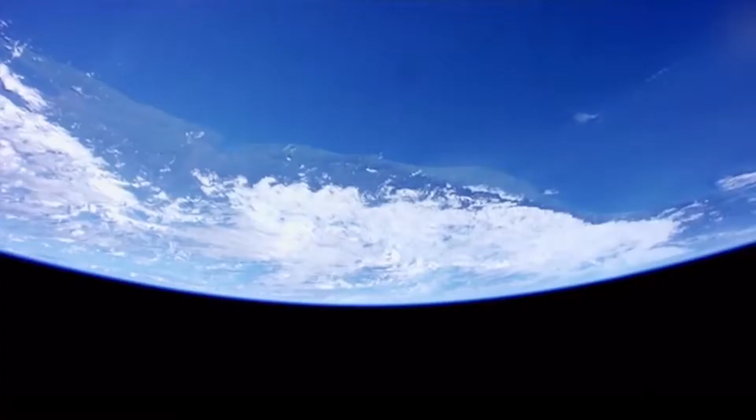A step towards a clean environment is adopting cleaner production or cleaner technology. Cleaner production, or CP, is a holistic proactive approach to end-of-pipe treatment that is applied to the entire production cycle, to increase productivity by ensuring a more efficient use of raw material, energy, and water, to promote better environmental performance through pollution reduction at source.

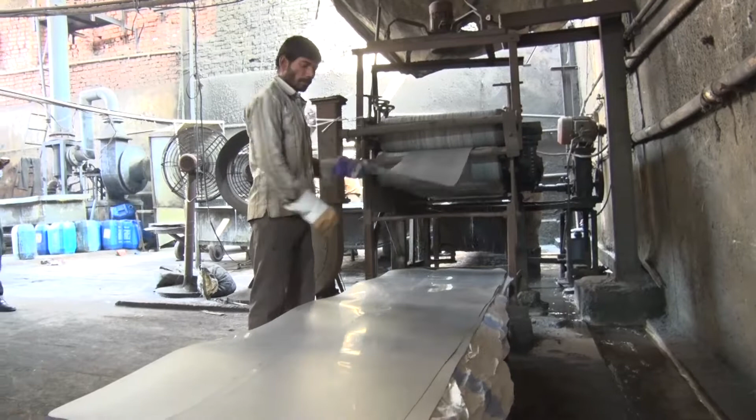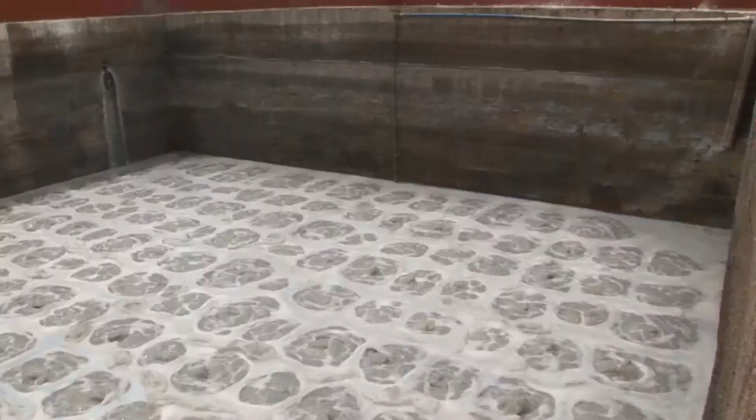Cleaner production is the improvement in operational processes to make more efficient use of inputs such as raw materials, water, and power along a company's value chain. On a broader scale, cleaner production can help reduce problems like solid, liquid, and gaseous emissions by adopting efficient manufacturing practices. In this context, waste is considered a product which can be used as a raw material for other industries.

Gujarat Cleaner Production Centre, or GCPC, has been established by the Industries and Mines Department, Government of Gujarat, with technical guidance of the United Nations Industrial Development Organization. Since 1998, the centre has been actively engaged in the promotion of cleaner production, or CP, and clean technology, or CT, through various activities such as orientation and awareness programs, CP assessment projects, CP demonstration projects, and CP dissemination programs.

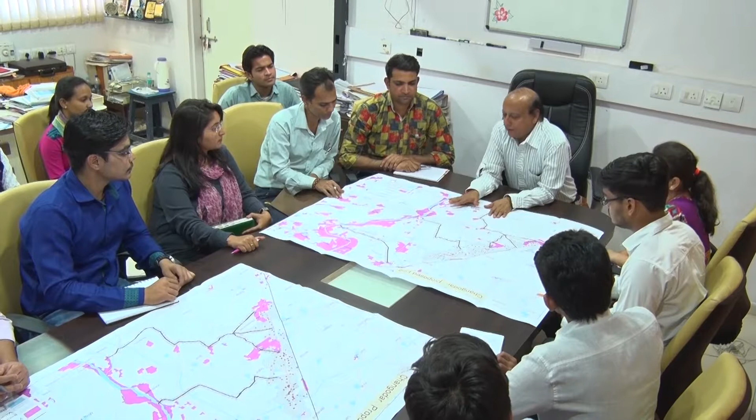GCPC is a regular member of RECP, the Resource Efficiency and Cleaner Production Network of UNIDO, and is also a regular member of the Climate Technology Centre and Network, a working arm of UNFCCC under UNEP. Gujarat Cleaner Production Centre is an Environmental Information System Centre working on cleaner production and technology since 2003, under the Ministry of Environment, Forest and Climate Change, Government of India.

The Environmental Information System Centre focal point ensures integration of national efforts in environmental information collection, collation, storage, retrieval, and dissemination to all concerned. The contributions of GCPC over the years towards promotion of CP and CT in the state of Gujarat, to improve productivity and reduce environmental problems faced by SMEs, have been significant.

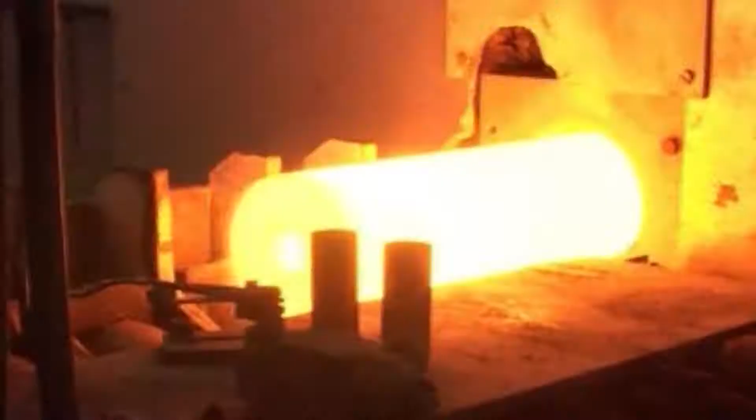Re-rolling industry is an inseparable part of the Indian industrial sector. Its contribution to the growth of the state as well as the nation is noteworthy. The success stories are many, but the sector still has a long way to go for achieving sustainable growth. The re-rolling industry has played a key role in the development of infrastructure, housing, and industrial development of the country in the past 50 years.

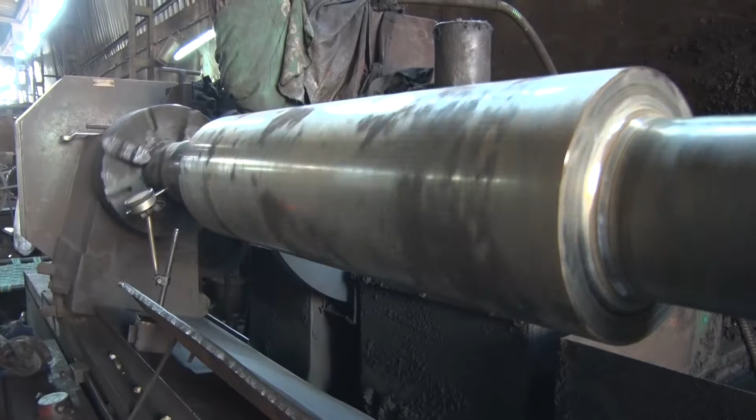India has approximately 1,800 re-rolling mills. The steel re-rolling mill industry in Gujarat has been in existence for over 50 years. The first re-rolling unit in Gujarat was set up in 1948 at Bhavnagar. There were 74 re-rolling mills in Gujarat in the year 1981. This activity spread over two major re-rolling clusters in the state, that is Bhavnagar and Ahmedabad.

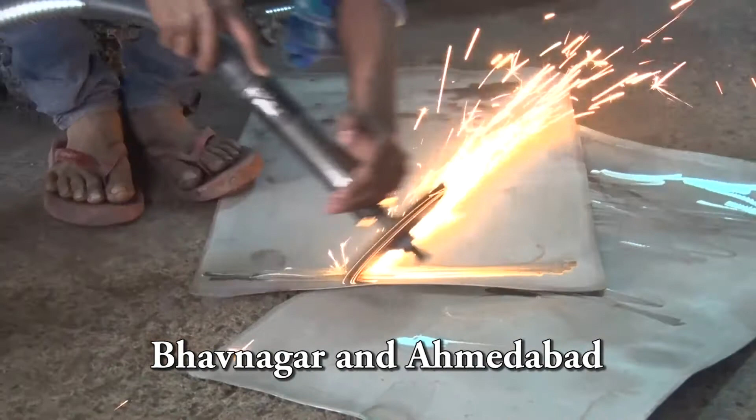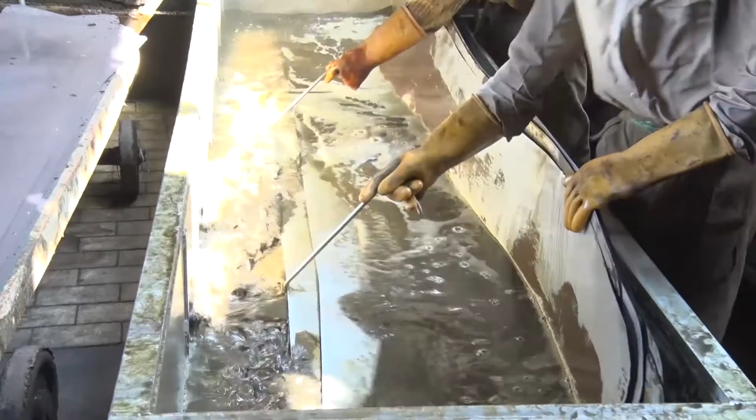The major concern of the re-rolling industry is the slag generated in the process, a major part of which is disposed of in landfills. The acid used in one of the processes in the sector produces a huge amount of sludge, so there is a need to introduce acid regeneration technique to decrease the environmental load.

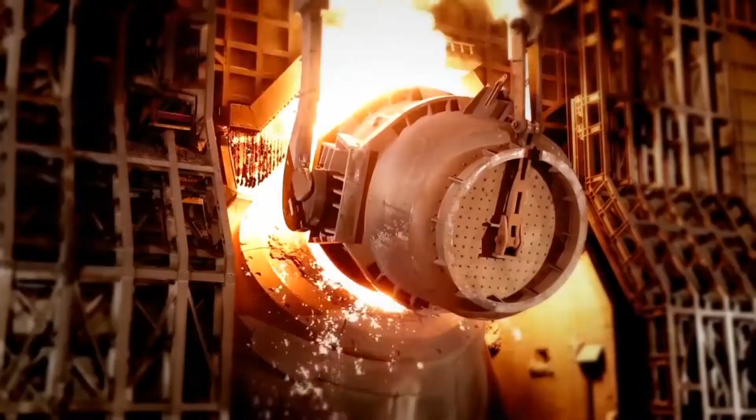With that, emissions of pollutants to air during reheating of furnaces and heat losses from the furnace are a cause of concern. Also, emissions including suspended particulate matter, oxides of sulfur, oxides of nitrogen, and carbon dioxide from induction furnaces are equally harmful to the environment and human health.

Unskilled labor and lack of standard operating procedures for the process are some other major areas to focus on. Since the beginning of the sector, no route has been established for automation, as the scale of operation is less compared to other sectors. Hence, there is a need for implementation of CP techniques which can reduce waste generation in the process and help save a handsome amount of capital, ultimately benefiting manufacturers as well as nature.

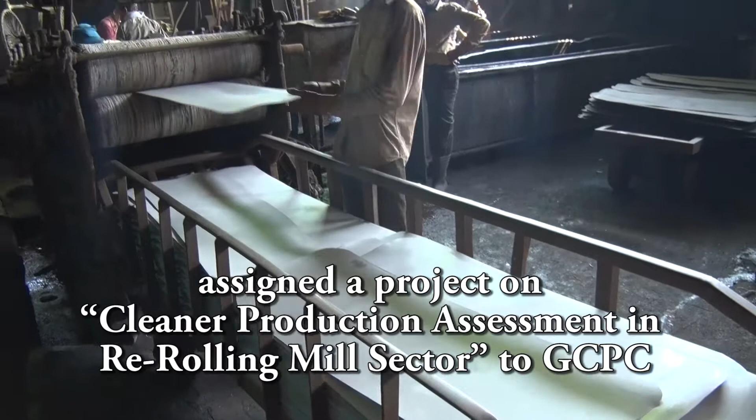Recognizing the need to eradicate these environmental issues in the sector, the Department of Forests and Environment, Government of Gujarat, assigned a project on cleaner production assessment in the re-rolling mill sector to GCPC, to reduce the load of emissions from this sector.

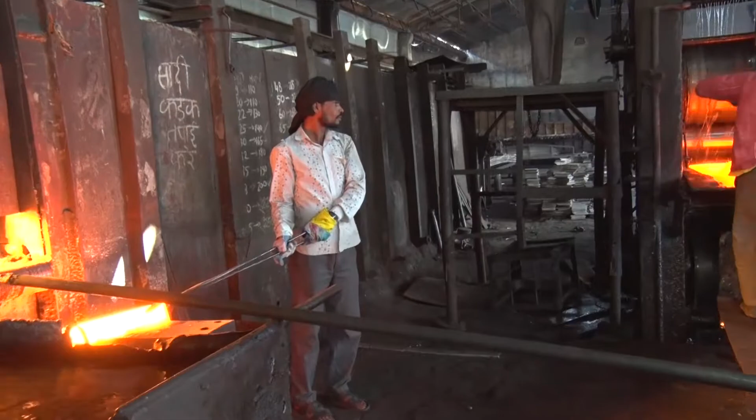Under this, 5 rolling mills were identified from different industrial clusters like Odhav, Vatwa, GVMM and Kalol, with varieties of products practicing hot or cold rolling. In these 5 rolling mills, detailed RECP assessment was conducted by GCPC.

Major project objectives include performing cost saving through reduced wastage of both energy and materials, improving operating efficiency of the plant, recovering waste materials, and building capacity of re-rolling industrial floor personnel.

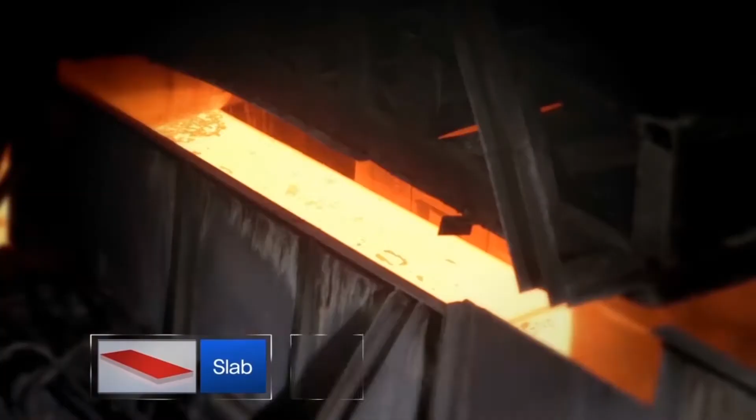Rolling industries are generally classified on the basis of the temperature for rolling. Hot rolling mills: in these mills, rolling is done above the recrystallization temperature of the metal. Hot rolling process can be done during uniform working temperatures. Hot rolling is used to break down the blocks into billets and blooms.

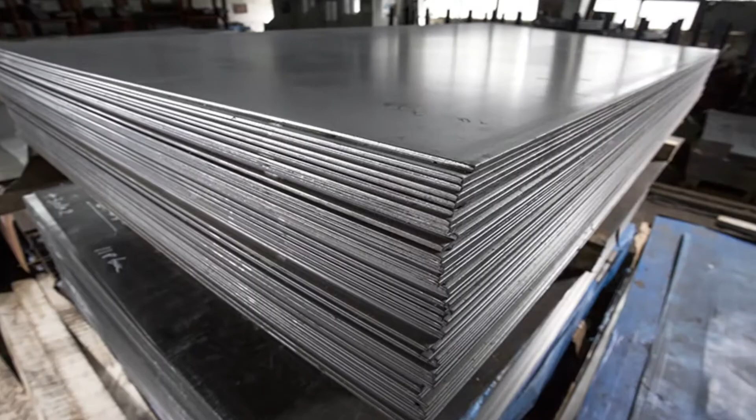From that, it transfers the material to produce new products like sheets and plates. Hot rolling is done at high temperature ranges only to develop large deformation, resulting in stress-free products.

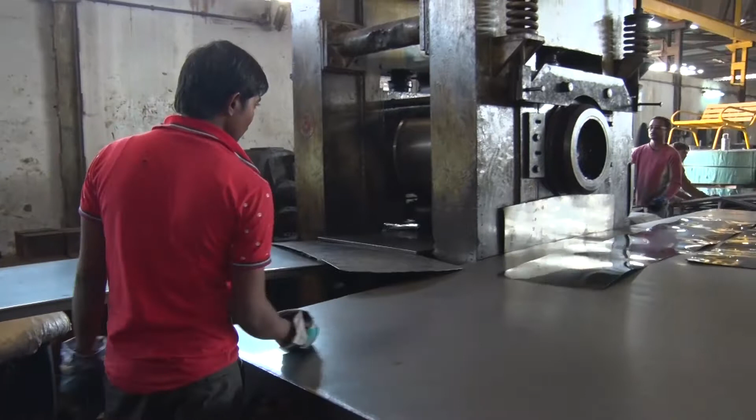Cold rolling mills: in these mills, rolling is done below the recrystallization temperature of the metal. Rolling in these mills, normally done at room temperature, increases the strength of the metal through strain hardening. It improves surface finish and holds tighter tolerance when compared with hot rolling.

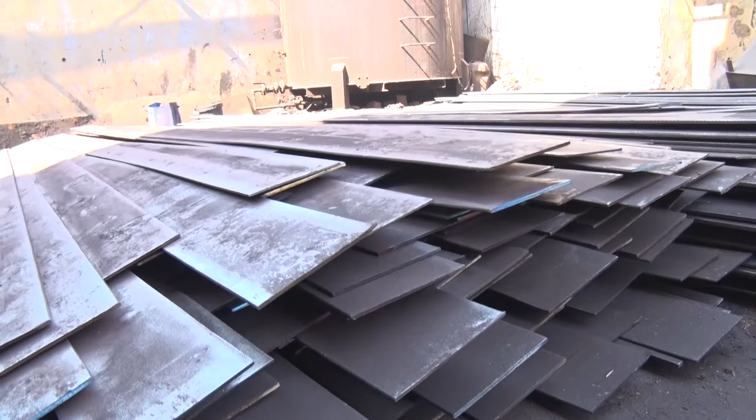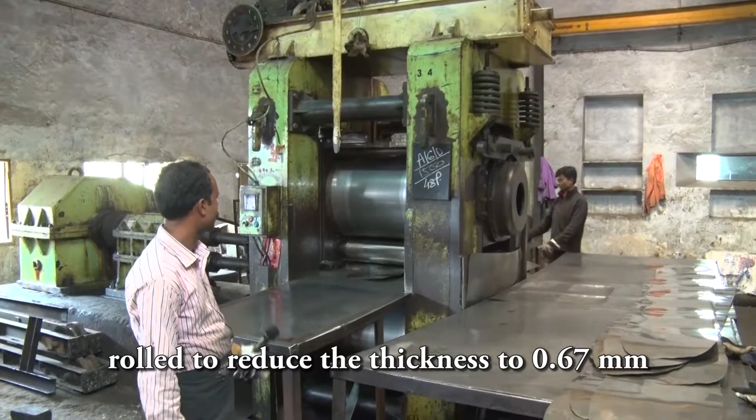Process for re-rolling industry: the raw material of the cold rolling process is the product of hot rolling mills. Stainless steel sheets from the hot rolling process have a thickness of approximately 1.5 mm, which is then rolled to reduce the thickness to 0.67 mm.

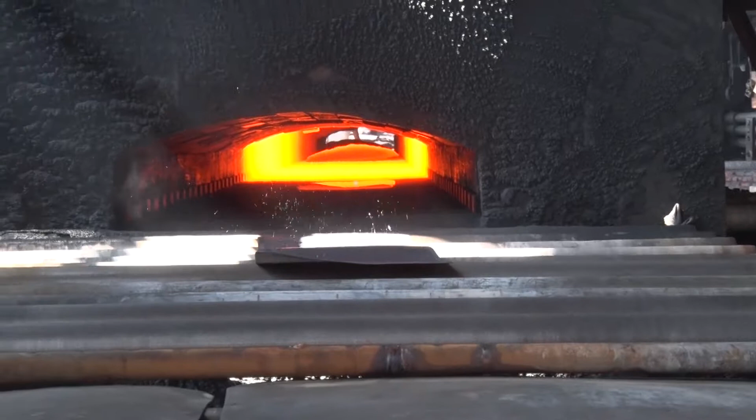Annealing process: the sheets obtained from the hot rolling process are sent to the annealing furnace of cold rolling, which is flat and holds a temperature of about 1000 to 1200 degrees Celsius. The main purpose of annealing is to remove the hardness present in the sheet.

As soon as the sheet comes from the other end, it reacts with the atmospheric oxygen. After that, carbon dust or process dust is generated on the surface of the sheet.

Acid pickling: this process contains sulfuric acid, nitric acid and hydrofluoric acid. The sheet, after being annealed, is dipped into the first tank of sulfuric acid and water. This removes 80% of the carbon present on the sheet.

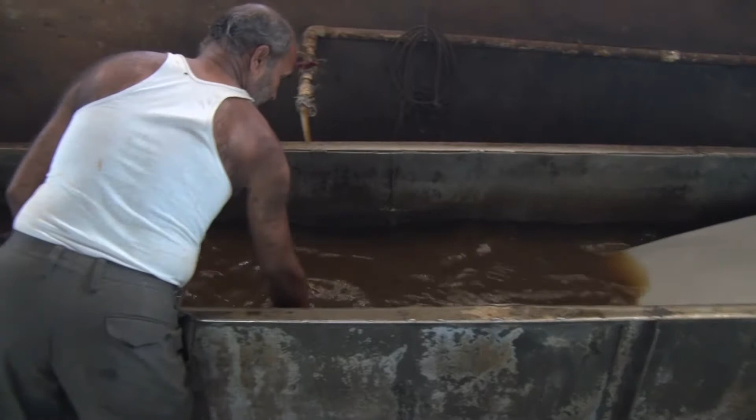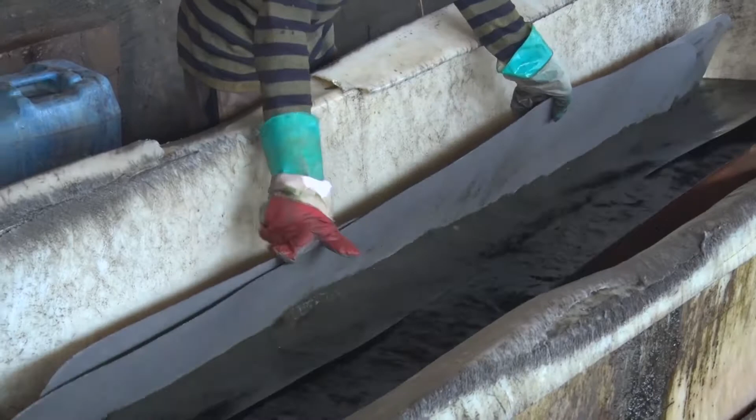Then, in the next tank, discarded acid and hydrofluoric acid is present. Continuous manual agitation is provided so as to remove the remaining percentage of carbon and get a shiny surface on the sheets. The last bath involves 40% hydrofluoric acid, 60% nitric acid, and 98% sulfuric acid.

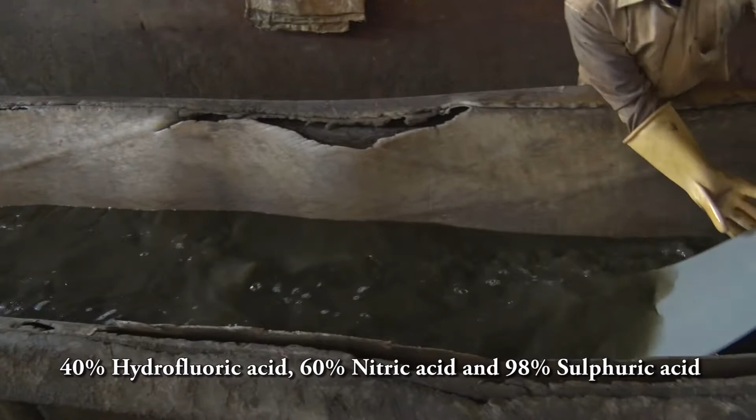This slot is the fresh combination of acid. After the last dip in the mixture of acid, the sheets are rinsed with water.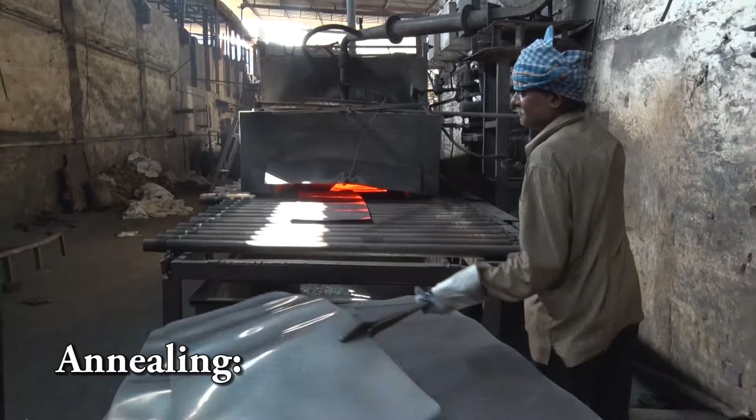Rolling: this is done so as to reduce the thickness of the sheet. Annealing: the sheets which are rolled in the rolling mills are annealed to reduce strength and hardness and to further elongate it.

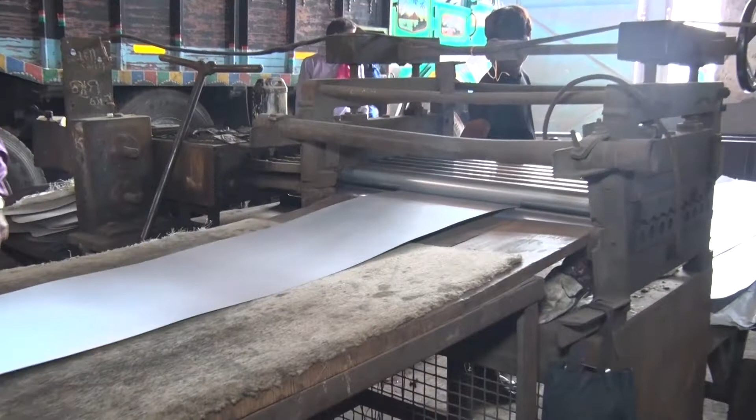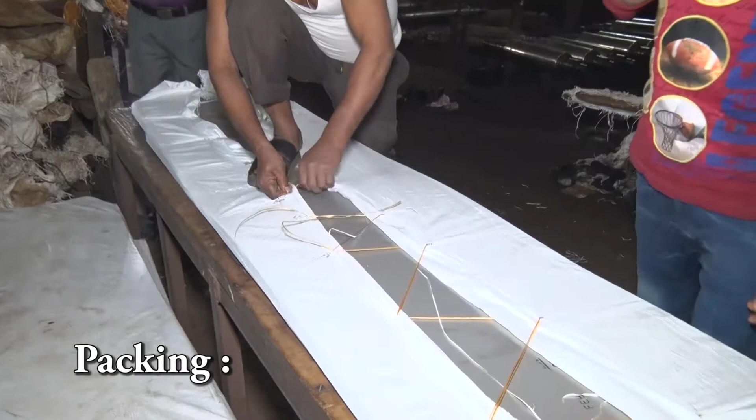Re-rolling: the sheets obtained after the annealing process are further rolled using the sheet level machine, where the sheets are leveled up to maintain uniformity. Packing: the final placement of items or packages, patta patti, in exterior shipping containers or other media, including necessary blocking.

The raw effluent, which is the mixture of wastewater and acidic impurities from the pickling tank, is sent to the effluent treatment plant for the neutralization process.

Cleaner production is the creation of a truly sustainable economy. It is a forward-looking, anticipate and prevent philosophy. To achieve this, a systematic CP methodology is prepared to build a roadmap.

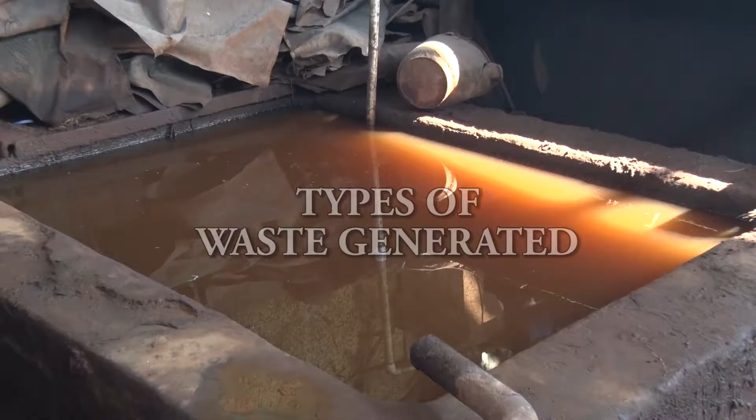The first step includes forming a CP team and identifying the waste streams. The waste identified under this sector, based on the process, includes types of waste generated: annealing process dust, with the amount of dust generated being 2.5 to 3% of input batch per day approximately, and heat losses.

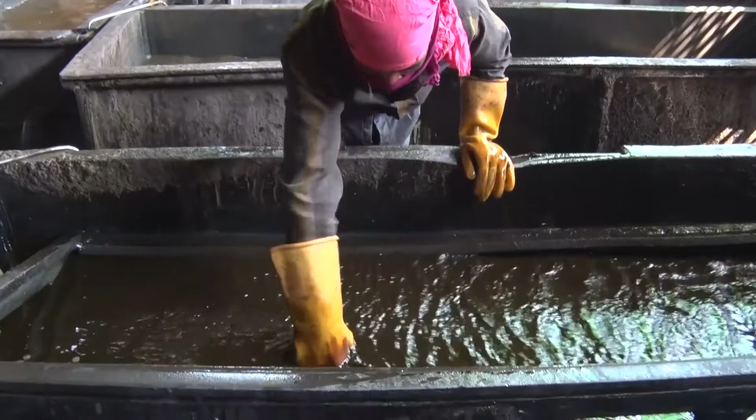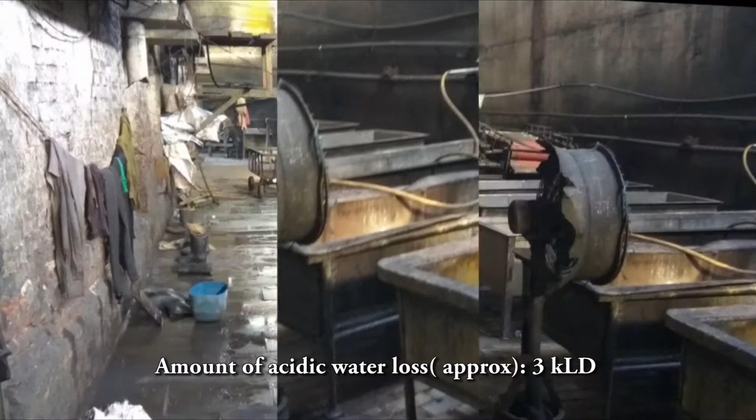Pickling spillage loss: it is the spillage loss during dipping the sheet in and taking it out of the pickling tank. The amount of acidic water loss is approximately 3 KLD mixed with acid. After performing a certain number of cleaning operations on the sheets, the reactivity of the acidic solution decreases, so the less reactive solution is of no use for further cleaning.

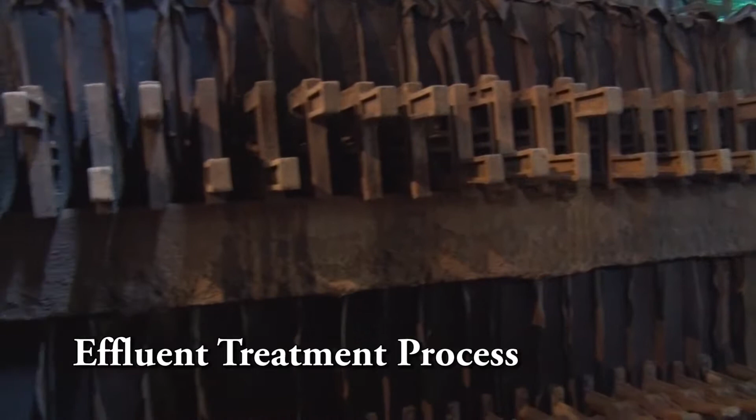Effluent treatment process: the acidic solution containing different concentrations of waste acid is neutralized by treating it with lime in the effluent treatment plant.

Due to this, solid waste is generated in large amounts. The sludge is sent to the TSDF site. Amount of gypsum waste generated is approximately 1200 to 1400 kg per day. There are also air emissions from the annealing furnace.

As per the RECP methodology, the GCPC team, under the guidance of Dr. Bharat Jain, Member Secretary GCPC, along with support of technical teams from individual industries, conducted a detailed assessment covering type of waste generation with its quantification, and other environmental issues associated with the selected rolling units from Gujarat. As part of the RECP Center, we are trying to get more and more different sectors of industries to approach us, so we can create successful outcomes.

Under this project by the Forest and Environment Department of the State Government, this time we selected a very important sector: re-rolling industries. As per my information, across the state we have about 1000 such industries clustered at Bhavnagar, Odhav, and Chhatral. We selected 5 industries where we conducted a detailed RECP assessment, including energy assessment as well.

We found there are certain issues like emissions, dust, solid waste disposal, and even acid disposal, and there is scope for energy assessment as well. So we involved our RECP team from the CP center, and also took support of an energy expert through outsourcing, and we came out with a number of good suggestions for this important but neglected sector, on how best we can address these environmental issues, including potential savings particularly in acid regeneration—because acid, though considered a waste, can now be recycled and reused.

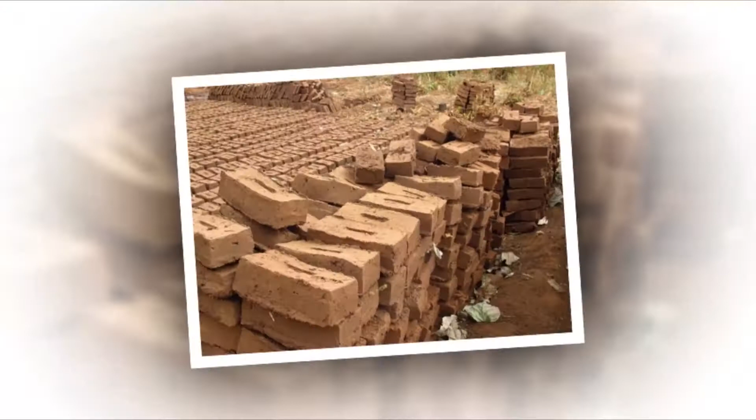Process dust generated from the process of annealing contains a large amount of carbon, which is disposed to landfill site. This process dust can be reused in brick making, paver block, and as a replacement of sand in concrete mixture. Industry has to apply under Rule 9 for reuse of this hazardous waste in brick making.

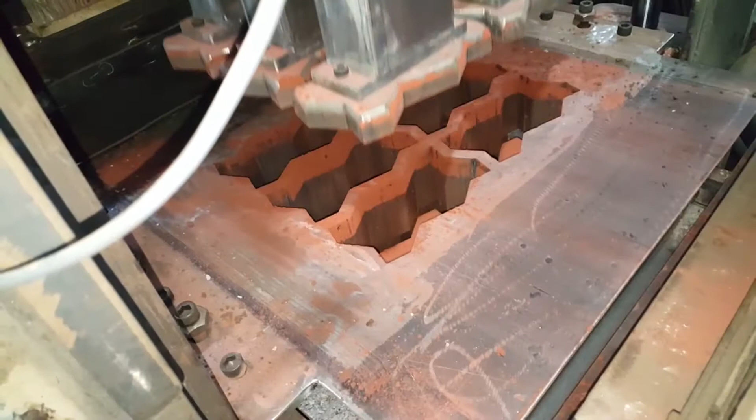Process dust contains oxides of iron, which are useful for making bricks as it contains less than 7% by weight of iron oxide as raw material.

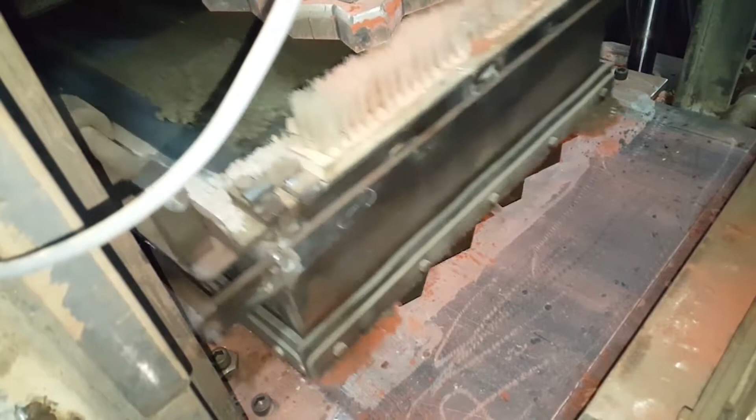Apart from brick making, process dust can also be used for making paver blocks by mixing sand with the process dust to increase compressive strength of the paver block. The process dust from the annealing furnace can also be used in a sinter plant or for making iron briquettes.

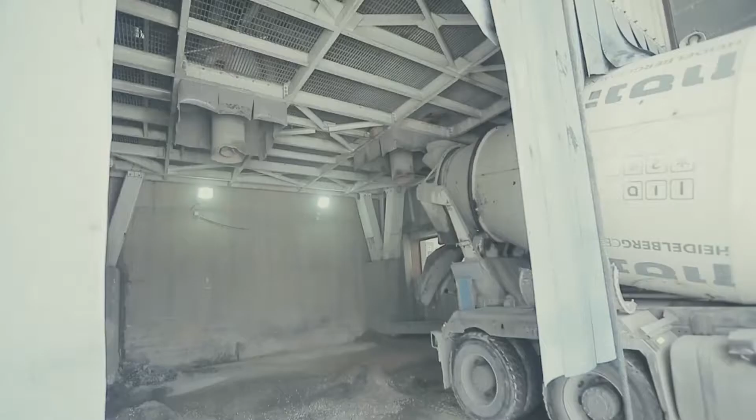Use of iron slag as partial replacement of sand in concrete will increase strength characteristics of the concrete mixture. This will also lead to financial benefits as the cost of transportation of processed dust along with packaging charges can be saved.

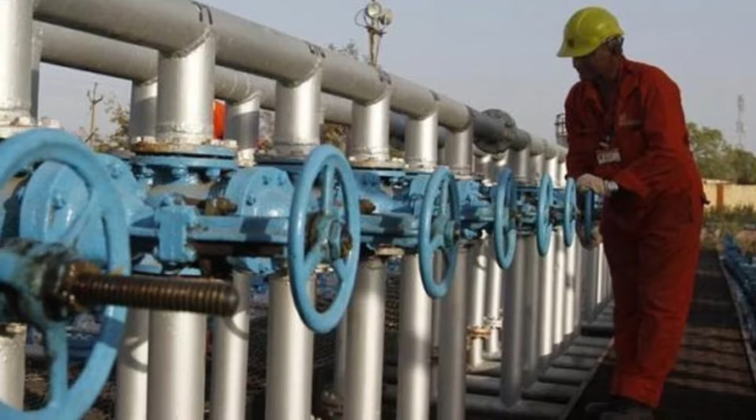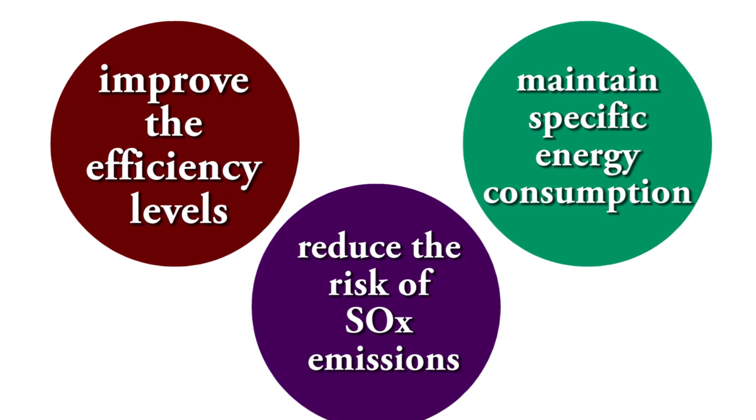Change of fuel: Due to the high toxic characteristics of carbon black feedstock and high risk of SOx and NOx emissions, adopting CNG or compressed natural gas in reheating furnaces will not only improve efficiency levels but also help maintain specific energy consumption within the standard limit.

Along with that, it will reduce the risk of SOx emissions. Replacement of fuel will not only save workers' health but will also leave a good shine on the surface of the sheets. CNG has the highest calorific value as compared to CBFS, carbon black feedstock, or furnace oil.

Need of quenching: In the cooling or quenching process, the forming tool remains closed for a certain amount of time until the part is cooled down from approximately 900 degrees Celsius to below 200 degrees Celsius. Cooling enables the steel material to harden so that the finished sheet metal part has a good final strength.

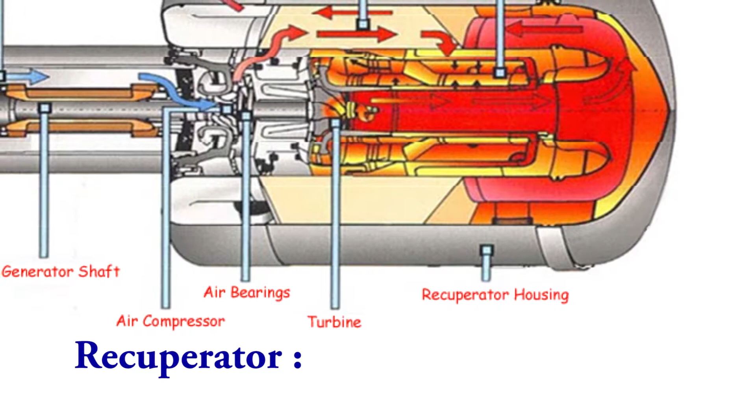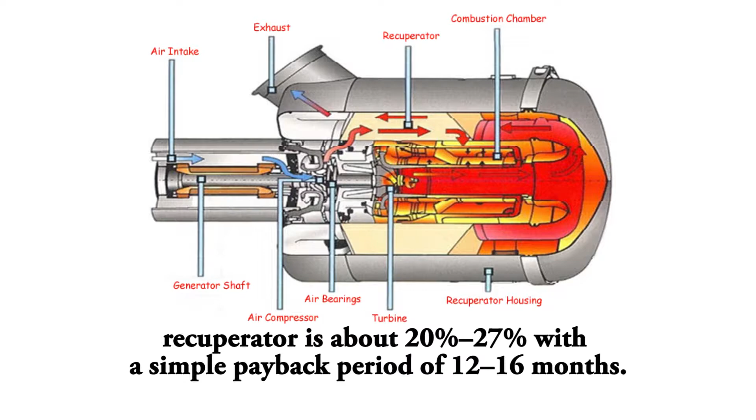Recuperator: The heat loss from furnace walls and material discharge doors is about 3 to 5%. The quantity of heat taken away from a reheating furnace by high temperature flue gases is quite large. The energy saving potential with a high efficiency recuperator is about 20% to 27%, with a simple payback period of 12 to 16 months.

Use of VSD: The quantum of waste heat generation is directly proportional to the quantity of air used for combustion of fuel. VSD can be applied to save energy. Controlling oxygen levels and using variable speed drives on combustion air fans associated with reheating furnaces helps in optimizing combustion in the furnace. The estimated energy saving is 4% to 9% of thermal energy.

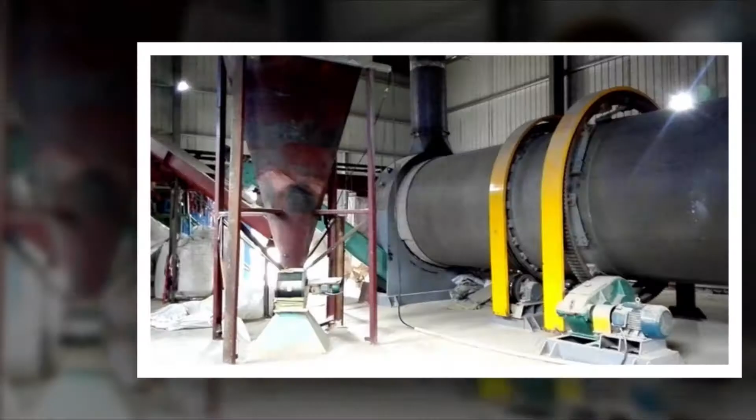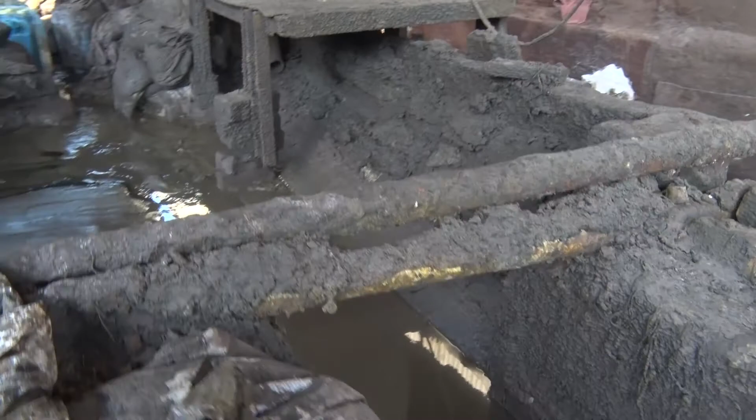Installation of dryers: The sludge produced from ETP is currently sent to the disposal site and not reused. The composition of sludge includes a high percentage of moisture, due to which it is not used in the cement industry. Also, this sludge cannot be used at excavation sites as it will lead to corrosion and will also provide a base for the growth of termites, for which a solar sludge dryer can be adopted.

Also, a rotary drum dryer can be used to remove moisture at the individual industry level.

Advantages of the solar sludge system: continuous sludge input is possible, it uses sun as an energy source instead of electricity, and the cost of disposal is reduced by 75 to 80%.

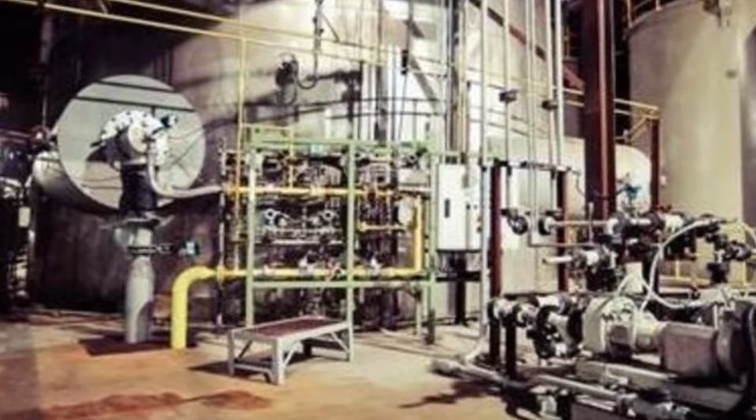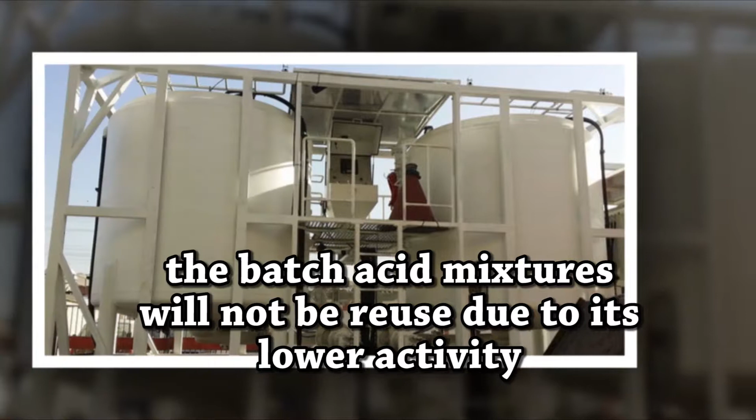Acid regeneration system: For the pickling process, mixtures of different acids are used for cleaning the sheets. After some time, the reactivity of the acid decreases due to continuous cleaning of the steel sheets. Therefore, the batch acid mixtures cannot be reused due to lower activity, so regeneration of acid mixtures can be done to reuse this acid.

The benefit of using this process is to prevent solid waste sludge generation by using the lime neutralization process, with 75% to 80% saving in consumption of lime. On a daily basis, 2000 liters of fresh water can be saved, there is a 75 to 80% reduction in generation of lime sludge, and disposal cost can be avoided.

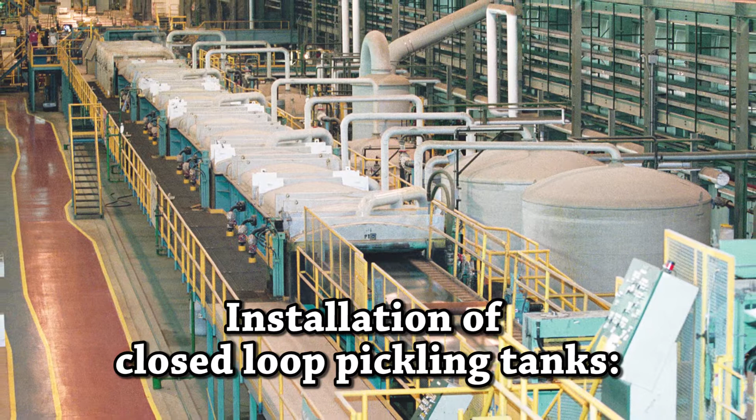Installation of closed-loop pickling tanks: Open pickling tanks generate irritating acid fumes in the pickling section, which cause a corrosive environment in the working area and also affect the health of workers working in the pickling section. So, to overcome this problem, the installation of closed-loop pickling tanks is suggested.

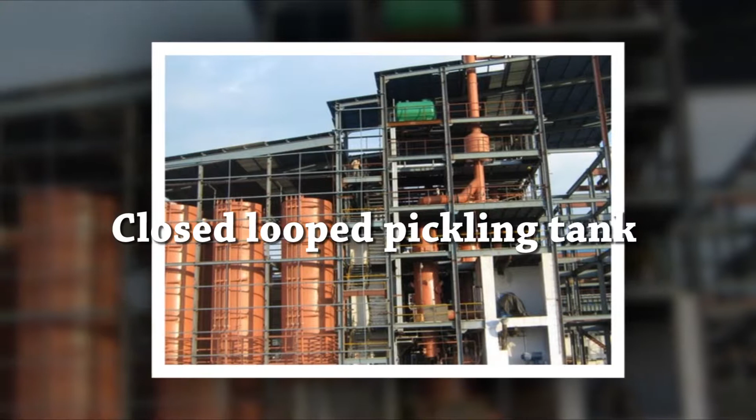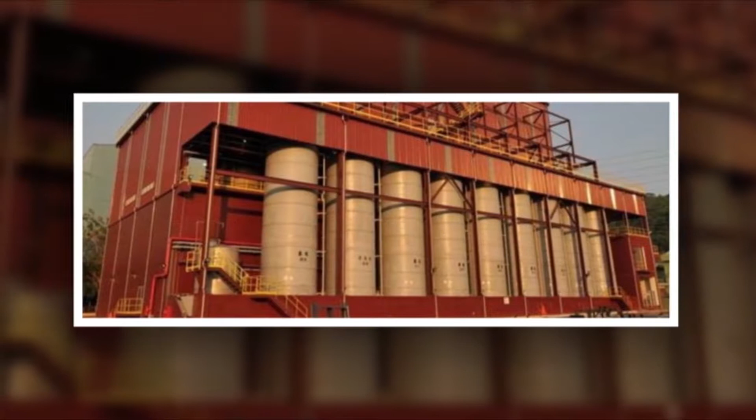Continuous closed-loop systems can also be installed, which can provide a continuous chain for the pickling process, avoiding spillage and cutting off the handling losses.

Sludge from ETP: generally 40 tons of sludge is generated every month from the industry. This sludge can be used as raw material in the cement industry. Gypsum plays a very important role in controlling the rate of hardening of the cement.

Major issue faced by the rolling mills while interlinking with the cement industry is the high content of moisture. For that, a rotary drum dryer or solar sludge dryer can be installed, and then the sludge can be easily reutilized by the cement industry.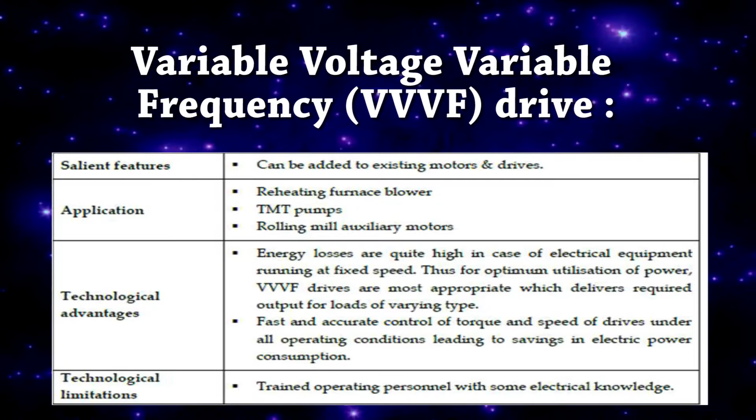Variable voltage variable frequency (VVVF) drive is a type of adjustable speed drive used in electromechanical drive systems to control AC motor speed and torque by varying motor input frequency and voltage.

The probable investment of VVVF drive includes up to 5 lakh rupees, leading to savings in specific power consumption by 2 to 3%, with a payback of less than 6 months.

Universal spindles and couplings: in rolling mills, spindles and couplings are used for transmitting power to the rolls from mill drives or motors. The probable investment includes up to 10 to 15 lakh rupees, leading to savings in specific power consumption by 5 to 8%, with a payback of less than 1 year. This will also lead to reduction in CO2 emissions by 5 to 10%.

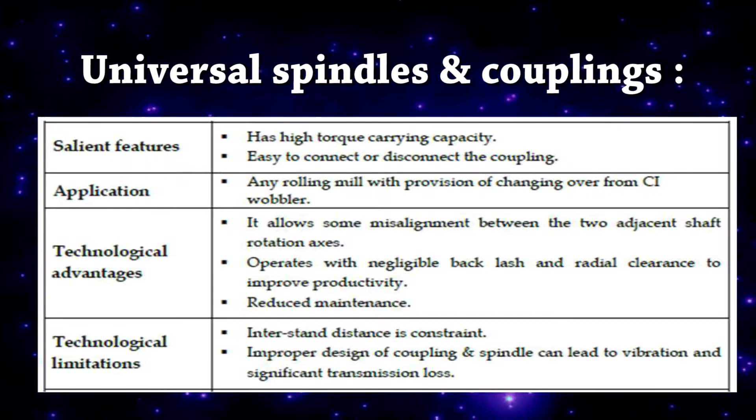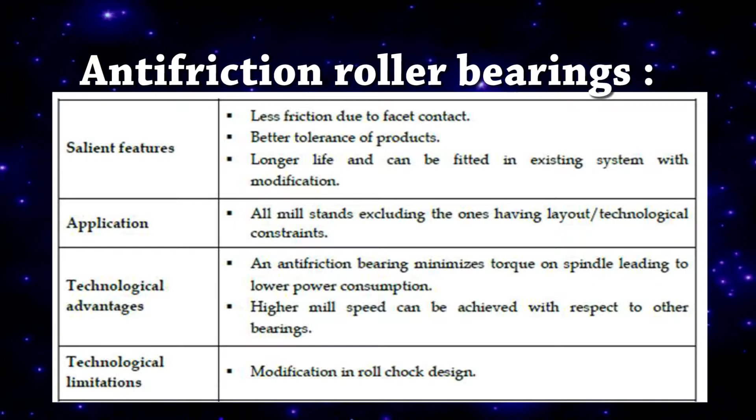Anti-friction roller bearings: the basic purpose of bearing in rolling mills is to provide frictionless support and guide a rotating machine part. The probable investment includes up to 3 to 6 lakh rupees, leading to savings in specific power consumption by 3 to 5%, with a payback of less than a year. This will also lead to reduction in CO2 emissions by 3 to 5%. Also, the mill utilization will go up by 5%.

Installation of tilting table towards the entry side and delivery side of passes between top roll and mid rolls ensures smooth guided entry of metal to the passes and also eliminates manual lifting and feeding of the rolling stock. So the mill utilization will go up by 5 to 10%. Installation of the same can reduce approximately 3 to 4 skilled manpower.

Oxy-fuel combustion system: oxy-fuel burners use pure oxygen, thus reducing the nitrogen component of combustion air and hence reducing sensible heat loss by reduced volume of flue gas. This will also lead to reduction in CO2 emissions by 30 to 35%, and savings in specific fuel consumption by 30 to 35%.

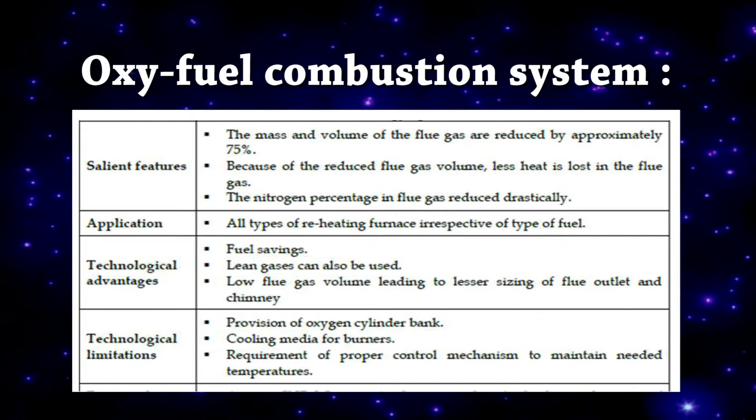General CP options like housekeeping, installation of dustbins, use of reflective paints in the offices so as to save electricity, and proper drinking water facility for workers.

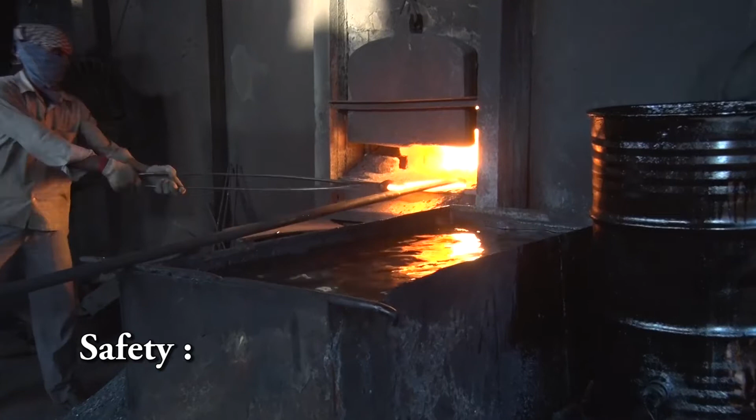Safety: use of gloves, safety shoes. Noise pollution level in the rolling industry is high, hence it is a safe gesture to always wear earplugs. Fire extinguishers, safety glasses in the pickling area, and rest rooms for workers.

Apart from RECP options, the RECP assessment also includes general tips for energy conservation, containing two major utilities: thermal and electrical. Thermal utilities - boilers: preheat combustion air with waste heat, and inspect oil heaters for proper oil temperature.

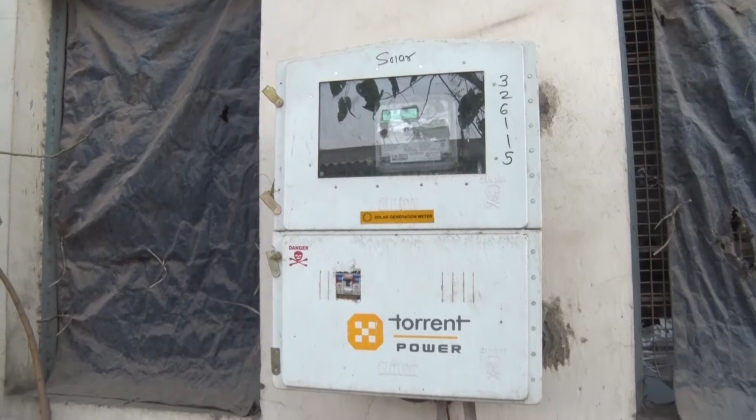Electrical utilities - electricity distribution system: optimize the tariff structure with the utility supplier, and minimize maximum demand by tripping loads through a demand controller.

Motors: properly size to the load with optimum efficiency, use synchronous motors to improve power factor, and check for undervoltage and overvoltage conditions.

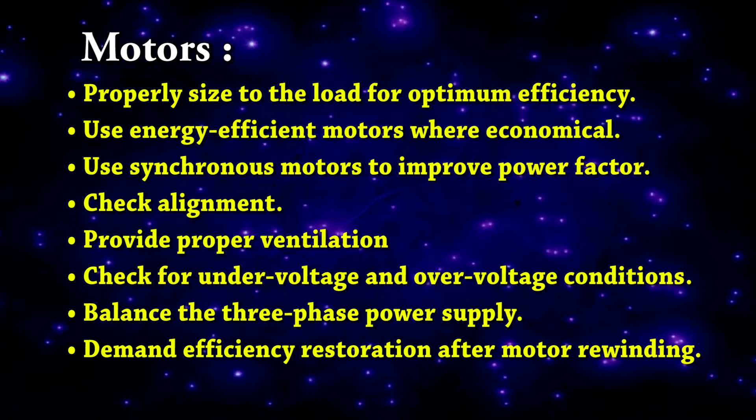Drives: use variable speed drives for large variable loads, and use high efficiency gear sets.

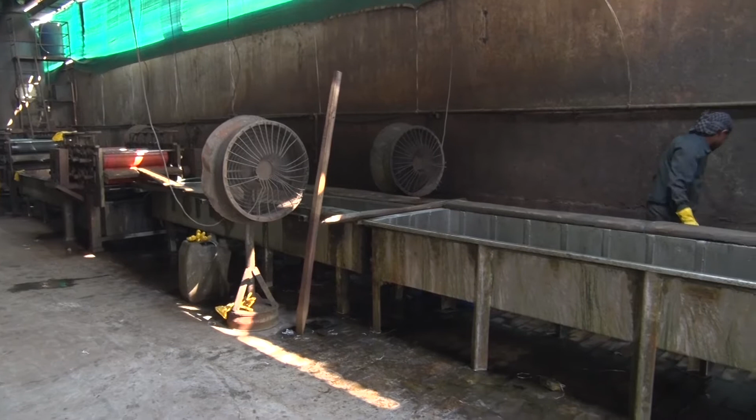Fans: avoid poor flow distribution at the fan inlet, and minimize fan inlet and outlet obstructions.

Blowers: use smooth, well-rounded air inlet ducts or cones for air intakes, and minimize blower inlet and outlet obstructions.

Pumps: operate pumping near the best efficiency point, and modify pumping to minimize throttling. Lighting, DG sets - overall achievement.

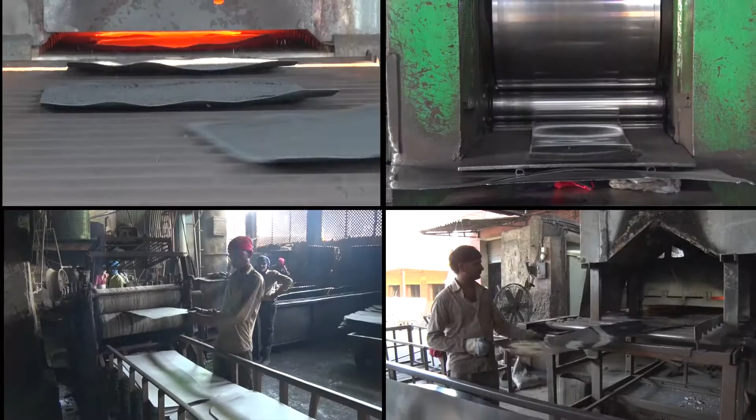After conducting successful RECP assessment in re-rolling mills, there are possibilities of reduction in water consumption and air emission, which will ultimately result in reducing pollution load.

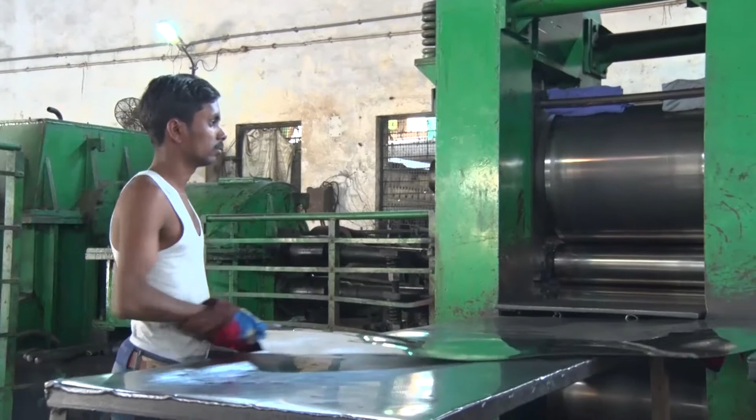Resource savings by performing resource optimization, recovery of waste material, conservation of energy by making energy efficient processes, improvement in productivity and quality, reduction in health and safety hazards to workers, skill development of the floor and technical personnel of industries, and replication of the results in other industries by preparing guidelines for cleaner production in the re-rolling sector.